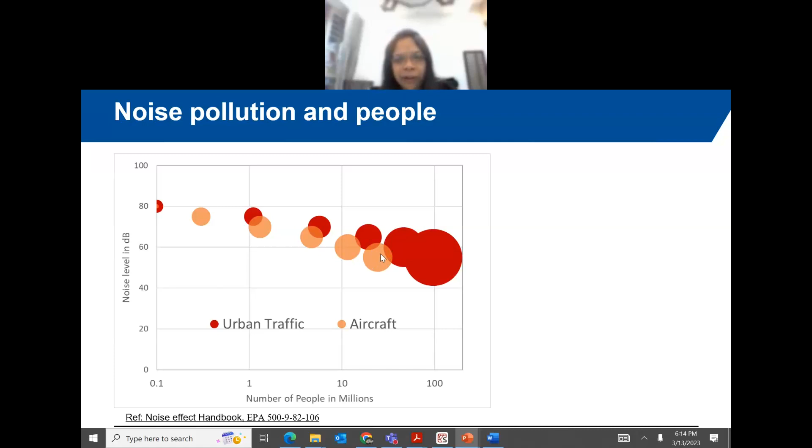The second most common noise source is aircraft noise, and the noise level generated is also significantly high. But if you look at the size of these bubbles, they are smaller. That means the population affected by these noise levels is relatively lower than for urban traffic. The rail noise and industrial noises are also relatively low. So this plot shows that urban traffic is affecting a wide range of people, and that should really be looked into if we want to improve people's lives.

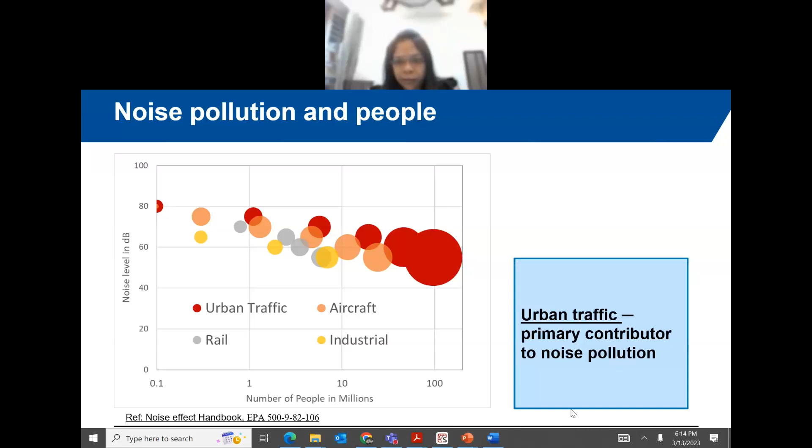When we look at noise pollution and how it spreads throughout the environment, noise is nothing but a disturbance that propagates through an elastic medium such as air or water. Usually, noise is nothing but an unpleasant sound. For example, when a vehicle is traveling, it generates noise, and that sound propagates through the air and is received by the receptor or receiver.

When we look at the physics involved, noise is nothing but a pressure wave, where the density of the medium changes. In terms of physical properties, noise and sound share similar ones. The amplitude of the pressure is the variation of the pressure over the hearing threshold. Our hearing threshold is 2e-5 Pascal.

The frequency is when we fix one particular position and count the number of waves passing through in 1 second; that we call frequency. The distance between two peaks or two troughs we call the wavelength. These are the basic sound or noise properties we can refer to, and they are very important as we go forward in this presentation.

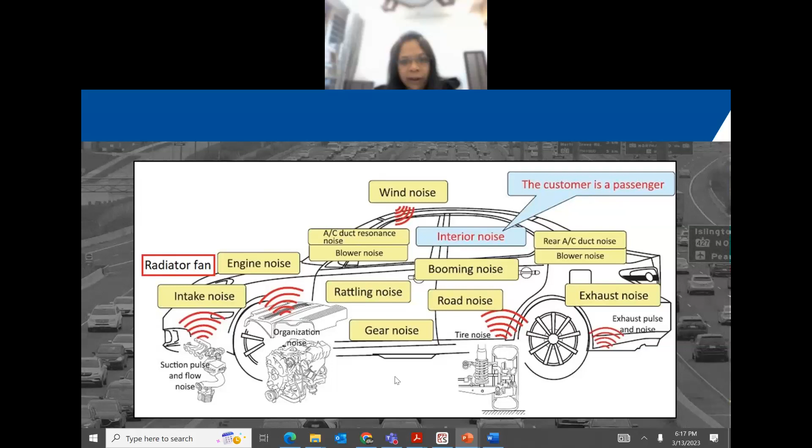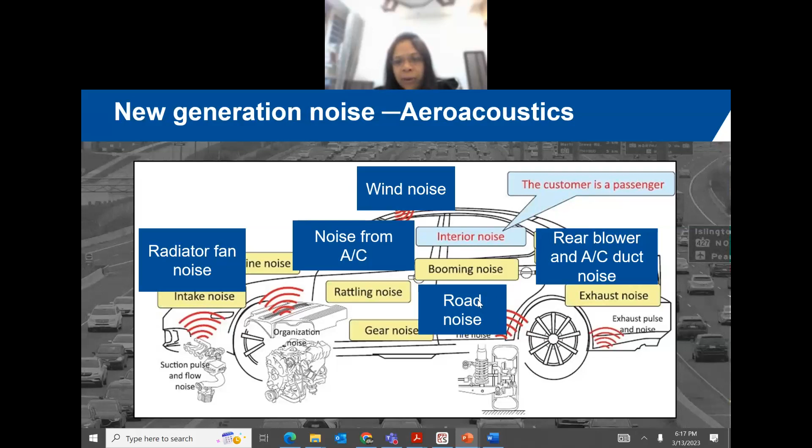But with electric vehicle development, the engine is gone and those conventional noise sources have been removed. So all those previously masked noise sources have popped up. Now we see that radiator fan noise, AC noise, wind noise, road noise, and the rear AC or blower noise are becoming dominant noise sources in electric vehicles. Road noise is not completely an aeroacoustic problem, but it is partially an aeroacoustic problem.

Apart from that, a new challenge is coming up: fast charging stations. Now the requirement is that we want our car to be charged very quickly, and that demands a very high fan RPM, because the heat produced by the batteries needs to be cooled down quickly. The high fan RPM produces a lot of noise, and that is one of the upcoming noise sources, or it has already entered the market and people's lives.

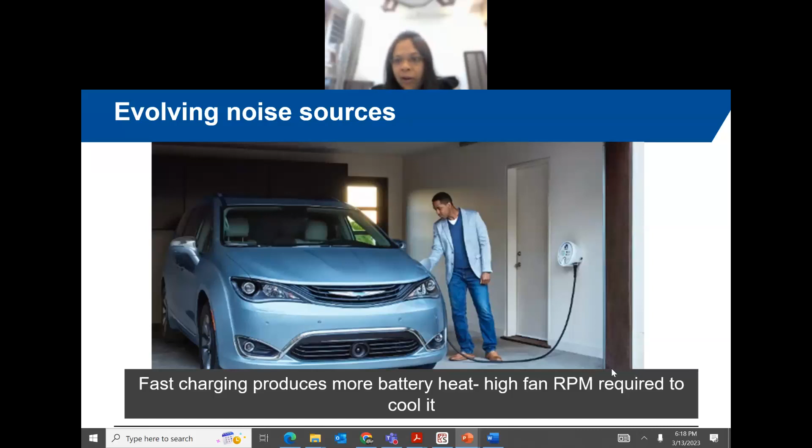Still, noise is a concern because, according to the British Medical Bulletin, noise causes permanent hearing loss, distress, hypertension, and cardiac diseases. Apart from these health problems, it is very important right now for an OEM to achieve noise comfort, because all other comfort has been addressed and customers are asking more about noise comfort inside and outside the car. So that's why it is more important for any OEM to develop such solutions.

Secondly, before launching the vehicle, the OEM has to qualify the pass-by noise certification. So now the engine and exhaust noise are gone. So all the other noise, like radiator fan noise, or other noises that are bothering the customer need to be reduced, and the pass-by noises like radiator fan noise need to be reduced to qualify the EPA certification.

And thirdly, now the competition is very big, and only with the leading technology can an OEM beat this competition. So therefore, noise is a big concern, and it's now a more asked-for customer feature for any vehicle.

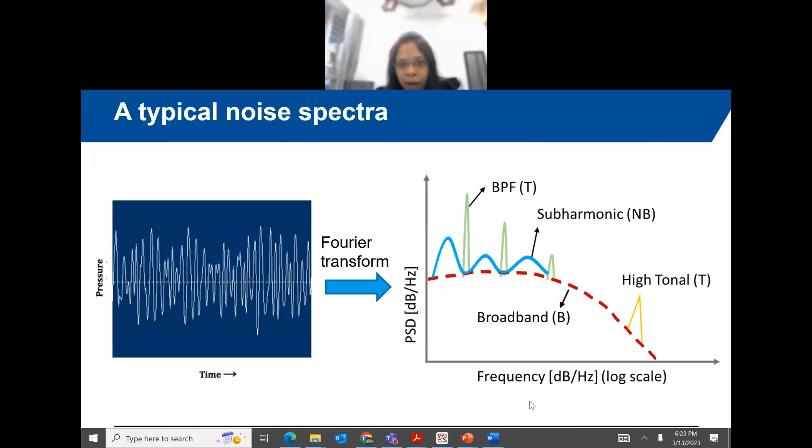So when we look at the different noise sources, we can categorize them in different forms based on the way they propagate. A monopole is nothing but a single noise source, and its wavefronts are traveling in all directions. And if we take the amplitude at any one wavefront, the amplitude does not vary. It will remain constant along any wavefront. This is a typical example of volume fluctuations; a real life example is loudspeaker noise. And if we plot its directivity in all 360 degrees, we will hear a single amplitude.

Secondly, the dipole source. A dipole source is nothing but two monopole sources placed at a position, but they are out of phase. So if this is in a positive phase, the other one is in a negative phase, and vice versa. And these dipole sources basically propagate parallel to their fluctuation, and we see that noise cancellation will happen in the normal direction of their fluctuation.

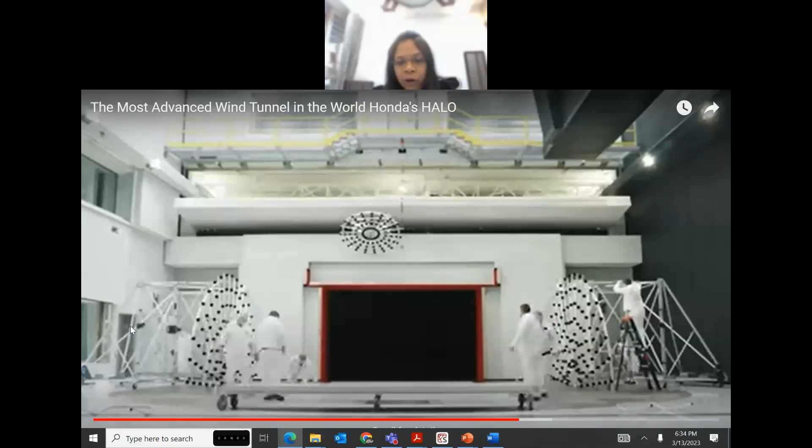And we talked about earlier, this would be really good for accessories, roof racks or spoilers or anything where all of a sudden there's a sound and they don't know where the sound came from. That's correct. The whole point of these arrays is to quickly give the engineer all the tools he needs to identify where the noise is coming from and how severe it is.

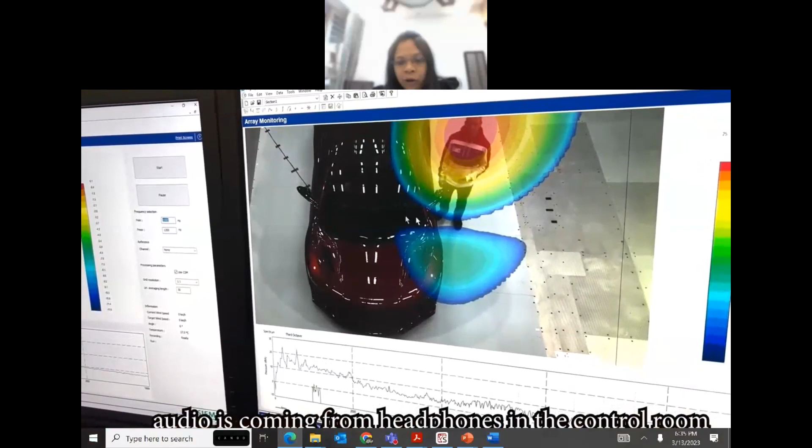When it comes to acoustic wind tunnel, there's a camera that I'm speaking into now, and all those microphones around me, and I want to see what it looks like in the control center when I'm speaking. So I'm at a normal voice now. I'm going to raise my voice to a much louder voice to see what it looks like in the control room, and the colors should be changing in my voice right now.

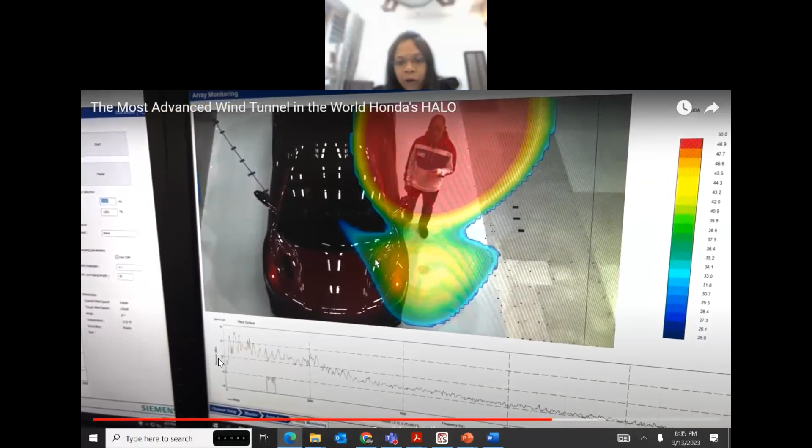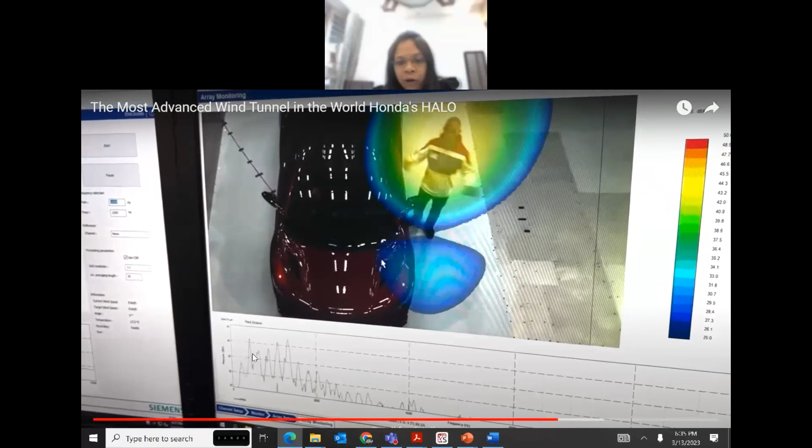And as I bring my voice down, I'm going to bring my voice down to a quiet whisper and see if I can get my voice to still be heard and to see how blue it is. So that should be a test from very, very quiet to a little bit louder to a little bit louder to a little bit louder to loud. How cool is that?

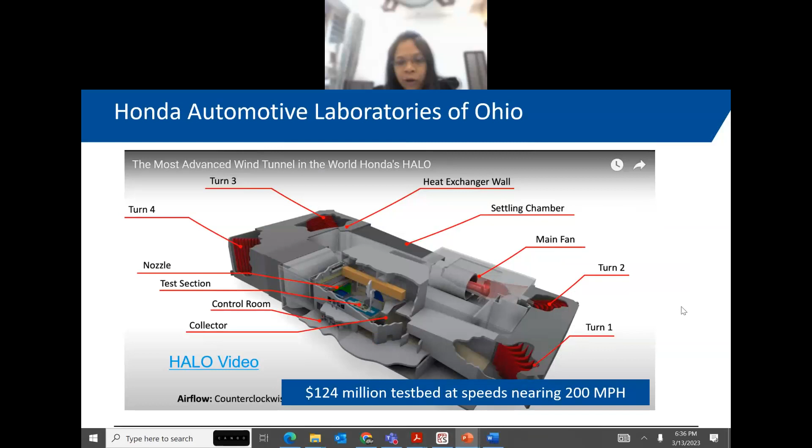So yeah, that is called the acoustic camera technique, where it identifies from which direction the sound is coming, and it helps to localize the noise sources. So before that, we can look at just a small bit of physics about how a microphone records the sound, and then we can go about other noise source identification techniques.

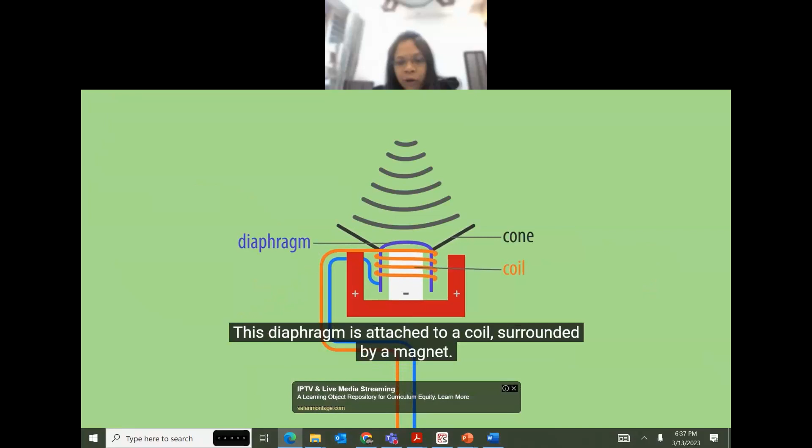How do microphones work? Though they have their differences and different uses, they are all transducers, converting sound waves to an electrical signal. The dynamic microphone is the most commonly used. These work using electromagnetic induction. Sound waves hit a thin diaphragm, which causes it to move. This diaphragm is attached to a coil surrounded by a magnet. This magnet creates a magnetic field around the coil.

The sound waves hitting the diaphragm are moving the coil, and the coil's movement past the magnet creates an electrical current. This electrical current is your sound signal. Loudspeakers work in reverse. Here, the incoming sound signal moves the coil, which in turn moves the diaphragm, creating sound waves.

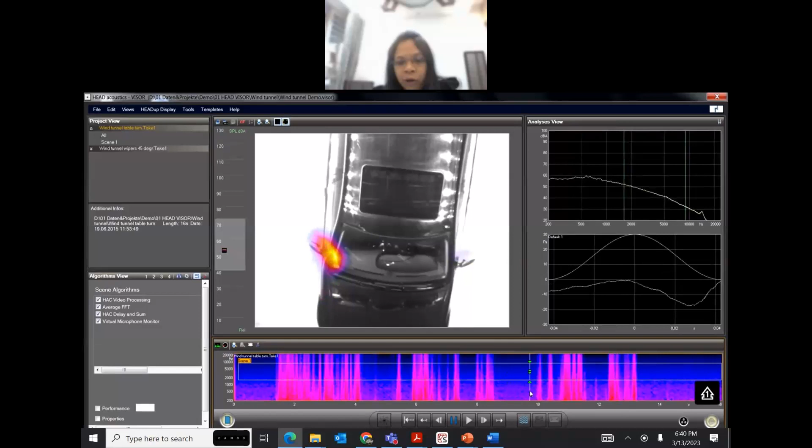Let's check out a real car measurement. The air arrives from the front. The two side mirrors are the obvious noise sources. But if we yaw the car a little bit to one side, we see an effect on the main radiating areas. The right mirror is less noticeable, while the left mirror area gets an additional noise source from the A-pillar close by. This effect increases the more we yaw this car.

Let's turn in the other direction. Here we have the situation again with the car into the wind at 0 degrees, and the noise is radiated from both mirrors. But when we yaw a little bit further, we see how the wind against the A-pillar becomes the dominant noise source. Let's summarize. Both systems use the same software and therefore

And then we can put some pressure sensors like surface pressure microphones, and then we can try to correlate between the surface pressure microphones and the far field microphones. Then there is another method to identify from which direction the noise is coming. So we can have near field microphones as well as far field microphones, and that will help us in noise source identification. So these are the methods that are used in any test setup.

So just to give an idea, a one-day testing at a wind tunnel for a full vehicle will cost around $70,000 to $80,000. So one limitation is that it is expensive. The second problem is we can test the noises only once the vehicle is built. And once the vehicle is built, going back and doing any design changes is very difficult. And that's why the simulation plays an important role here.

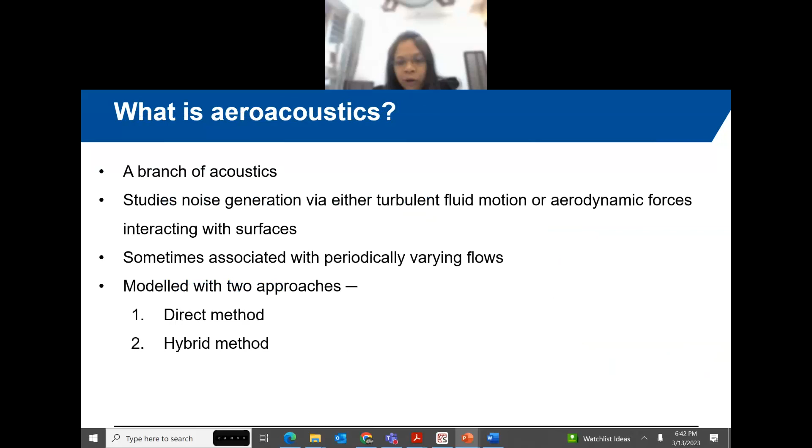And these noises can be modeled either with the direct method or with the hybrid method, and we can look at their pros and cons in the coming slides. So the direct method is where we put all the microphones around the source, and these microphones are included in a computational domain. So the pressure wave or the pressure fluctuation that is traveling from source to the receiver is modeled in this domain.

One of the advantages is that if there are any objects present between the source and receiver, and if they are causing any scattering or reflection effect, that is properly captured in this type of simulation. The noise prediction accuracy is very good. I have done a couple of simulations with direct acoustics, and believe me, the prediction is on top of the test data. So it is a really good, accurate method when it comes to predicting accurate noise levels.

Whereas this method requires large computational time as well as a big computational domain, because we need to include the noise sources and microphone receivers inside the domain, based on the frequency of interest. For example, if you want to capture high frequency noise, then we need to solve this equation at a very low time step, for example, 2e-5 seconds.

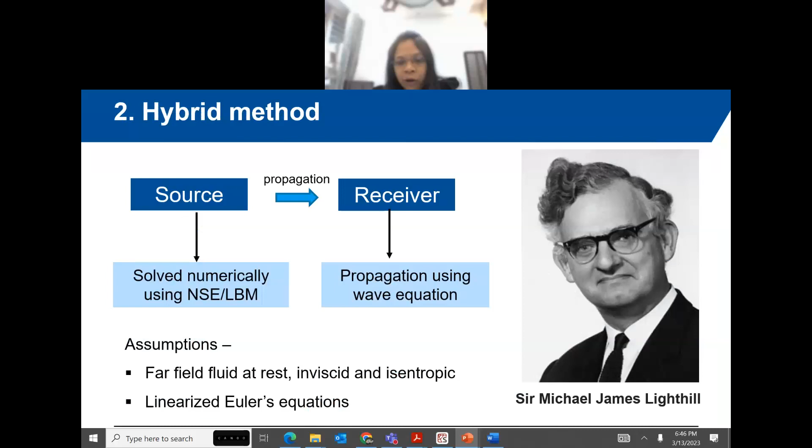Whereas Lighthill analogy tells us that we can model just a domain very close to the jet region, and that will give us the source. So this source is nothing but it's called the Lighthill tensor. And then once we know this source, we can use this wave equation to propagate the sound. So this is the basis of the analogy, and it's a typical example of any non-homogeneous wave equation.

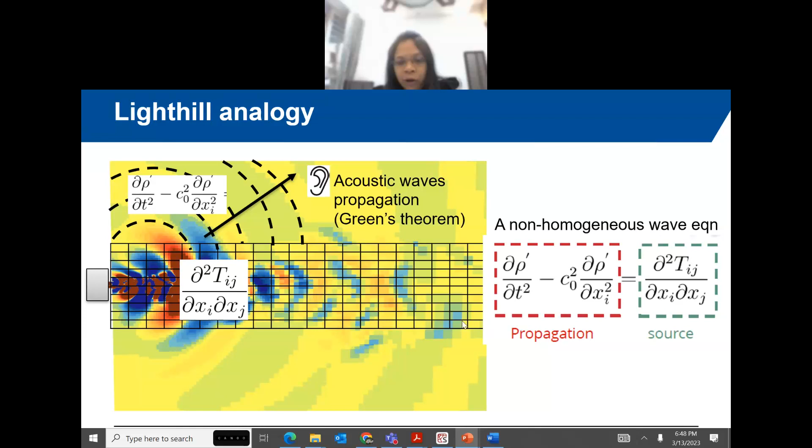So Lighthill analogy was very limited to high Mach numbers, and for only jet flows, where the noise is mainly generated by the turbulence produced by this jet flow. But the engineering problem is not only limited to these jet flows, but there are always some surface interactions, or sometimes the surface is rotating. And that's what Curle has added, extended Lighthill analogy, and he introduced a surface in the flow field.

And now he came up that the noise propagated in the far field is the result of lift fluctuation caused by the incoming flow. So once we know the lift fluctuation, we can propagate it to the far field using the same non-homogeneous wave equation. Secondly, Ffowcs Williams-Hawkings analogy identified that there is a need of including the rotation to these surfaces. Therefore, they modified the equation so that we can account for the rotating machineries as well.

So now we understood the direct method and the analogies that have been used, and the analogies adapted for the surface and the moving surfaces. So there are other methods also present, which are called hybrid methods. In hybrid methods, one of the methods is LEE. It is short for linearized Euler equation.

It's the same phenomenon: instead of modeling the whole computational domain, we can model just the domain very close to the source. The only difference is the way we propagate the noise is different than the analogy. The analogy is the analytical solution of the non-homogeneous wave equation, whereas here we are using the linearized Euler equation. We are solving the wave propagation on an inviscid domain, and this makes the computation relatively cheaper compared to the direct method, whereas it has a disadvantage that it needs a very small mesh when it comes to high frequency noise recording.

Then next is the control surface method or Kirchhoff method. In the Kirchhoff method, the pressure fluctuations are measured on the control surfaces, and then these pressure fluctuations are solved numerically, so that we can identify the noise levels at the receiver location. This method is suitable for a fixed medium where the medium of propagation is not moving. But there is a solution given by Goldstein et al., where they provide the solution for the moving medium also.

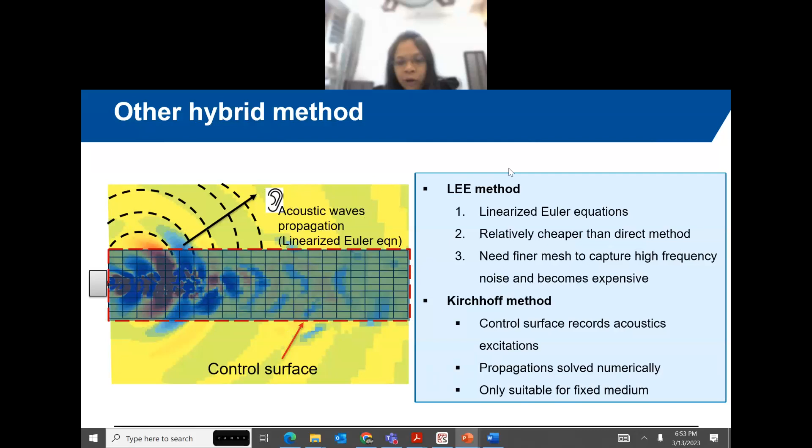So we understood how we can propagate the source, but now we can look at how we can model the source. To model the source, there are multiple methods present. If you want really accurate calculations of the flow field, we can always go for direct numerical simulation, where we solve the 3D unsteady compressible Navier-Stokes equations. But it requires a very large domain, and huge computational cost is involved. Even with cloud computing advantages, we still cannot use direct numerical simulation for any industrial problem. It is still limited to academic research problems.

Another alternative is large eddy simulation. Second is detached eddy simulation. Third is scale adaptive simulation. And then there are turbulence models, such as one equation and two equation models. We will see these briefly in coming slides, but make sure that you go through the continuity and momentum equations. Continuity is change of mass in time and space, and momentum is movement of the mass in the domain and variation of the mass with respect to time, equated to the pressure variation, some stress variation, and external forces.

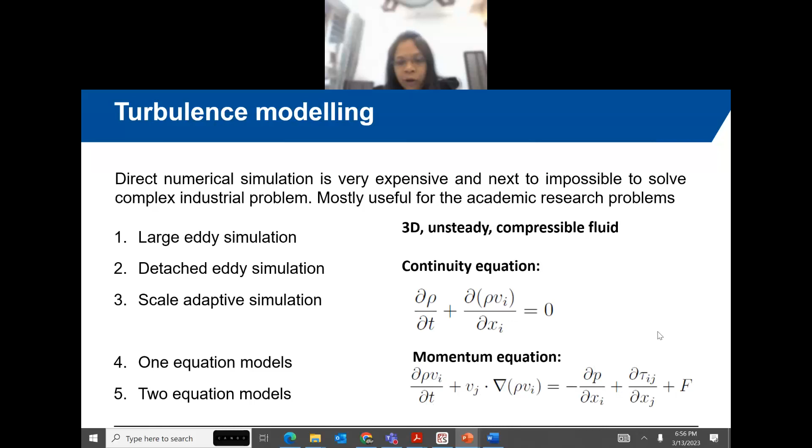In large eddy simulation, we discretize the domain with some given mesh size, and this mesh size identifies which eddy sizes can be solved and which can be modeled. So this mesh acts as a filter, and you can see the averaging here: the flow field variable is decomposed into mean and fluctuating parts. The mean part is solved over a mesh size using this integral equation. This solves the compressible Navier-Stokes equations in transient form over the computational domain. It resolves the eddies based on the mesh size, but eddies smaller than that are modeled with RANS, Reynolds averaged Navier-Stokes equations. The filter size is based on this G filter; the solved flow field is filtered with G in space.

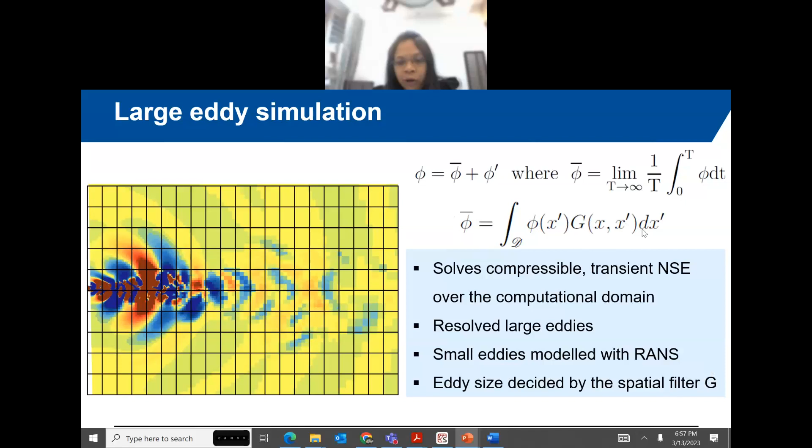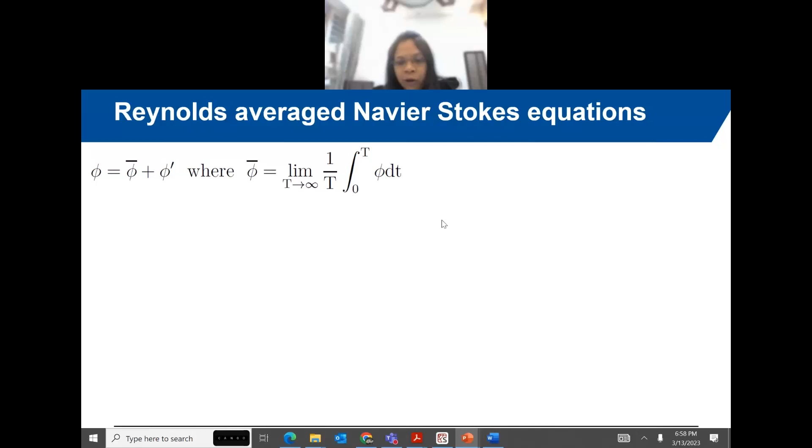So we can have different approaches to model the eddies smaller than the mesh size. And to make the problem easier, Reynolds introduced this averaged equation, known as the Reynolds averaged equation, where he divided the flow field variable into mean and fluctuating quantities and re-derived the Navier-Stokes equations. Once re-derived, they introduced 9 extra terms, and identifying these 9 extra terms was a challenge. Therefore, the Boussinesq assumption is used, where these turbulence stresses are equated to the linear rate of deformation through turbulent viscosity.

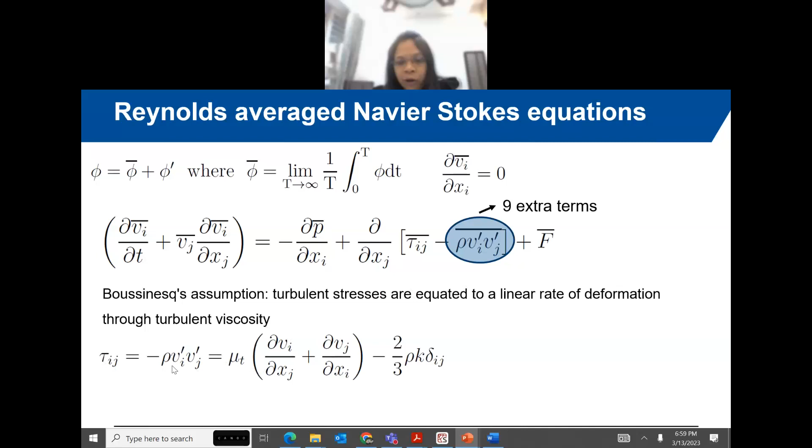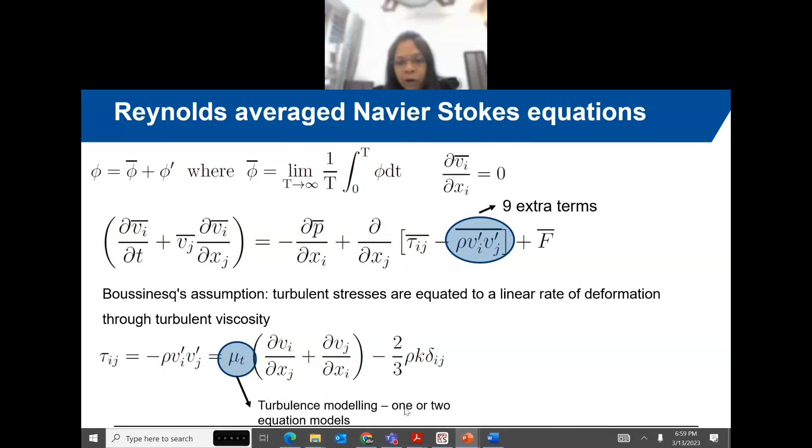If you look at the usual shear stress equation, this is tau ij, and we equate it to viscosity and the change in velocity. So this is what happens: this minus rho vi vj has been modeled with this equation, and this mu t is again the challenging part. The way we solve this mu t is with one or two equations, and we call those turbulence modeling equations.

So these are based on the Navier-Stokes equation that we have discussed so far. There is another method which is known as the lattice-Boltzmann method. It is mainly based on Boltzmann's kinetic theory, and it is based on the mesoscopic approach rather than the macroscopic approach. Navier-Stokes is based on a macroscopic approach, where we divide the flow field domain into small control volumes, whereas in kinetic theory we divide the domain into small particle sizes. And based on that approach, we solve these Boltzmann equations.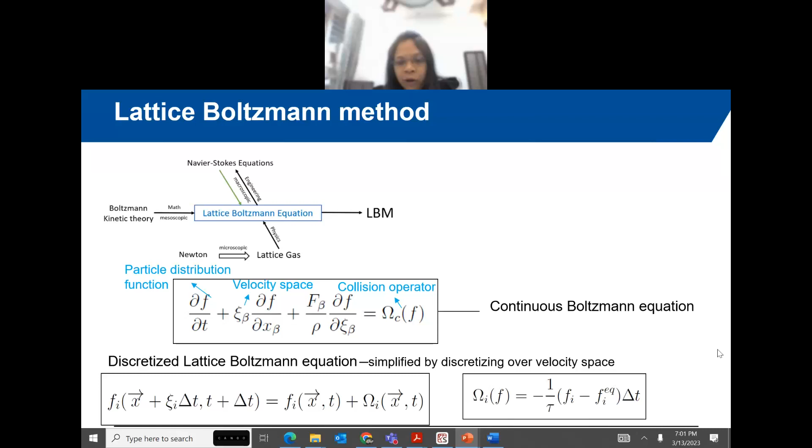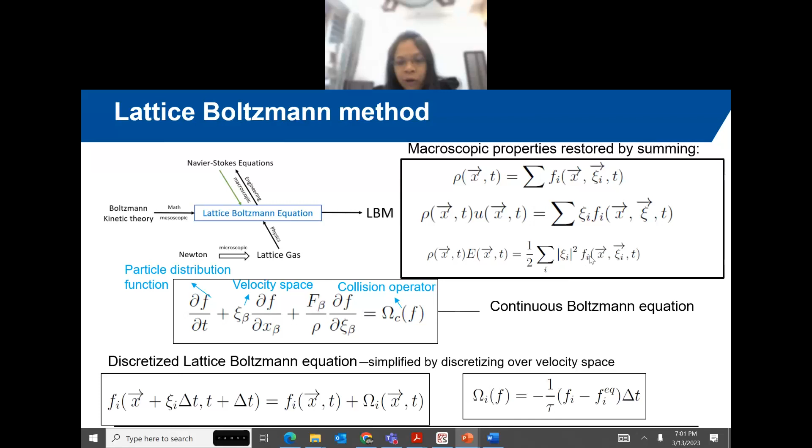And once we know the PDF in the future state, we can identify its macroscopic properties by summing over the PDF to get the density. When we sum the PDF over velocity space, we get the momentum equation. And if we want energy, we can include velocity squared on the PDF, where we get the energy equation.

So there are multiple advantages of the Navier-Stokes equation versus the LBM equation. Navier-Stokes is very popular. It has been adopted by almost all industries. A lot of commercial options are available, for example ANSYS Fluent, Star, and there are multiple other companies using these Navier-Stokes equations. They are based on either a finite element or finite volume approach, but underlying they are solving the Navier-Stokes equation.

They have a dispersive discretization scheme. For example, when the noise is produced at say 40 dB, and when it is propagated to the far field, the simulation may disperse the amplitude as well as the frequency. So they don't have very good low order schemes. If you want to capture the acoustic signature in the far field, we are supposed to use a high order scheme, and that becomes very expensive.

And moreover, to capture any frequency, we need to have, like the example given here, for 2000 hertz, the wavelength is almost 170 mm, and to capture this frequency, we need to have almost 340 grid points in our computational domain to capture the amplitude and the frequency properly.

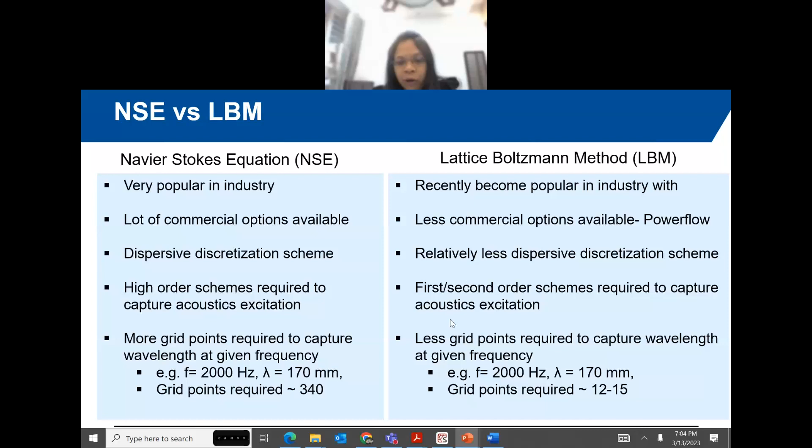Whereas the lattice-Boltzmann method, although it has been known for a long time, has become popular recently with the commercial option available, PowerFLOW, provided by Dassault Systèmes. It has a relatively less dispersive discretization scheme. So instead of going for fourth or fifth order in the Navier-Stokes equation, we can use a first or second order scheme to capture acoustic excitation properly. And again, it is computationally cheaper because for a given 2000 hertz frequency, it will require only 12 to 15 grid points compared to 340 points in the Navier-Stokes equation. So when it comes to noise propagation in the far field, the lattice-Boltzmann method is far more effective than the Navier-Stokes equation.

So this is the background of the acoustics, how we can model the acoustic source, what acoustic sources are present, and how we can record those noises in test, because as CFD engineers we use such high order mathematics, but ultimately we have been asked to correlate the simulation results with real life experiments. Therefore, it is very important for any aeroacoustics engineer to know how the test has been conducted and what potential disturbances can be recorded by those microphones. That knowledge is very important when it comes to the correlation part.

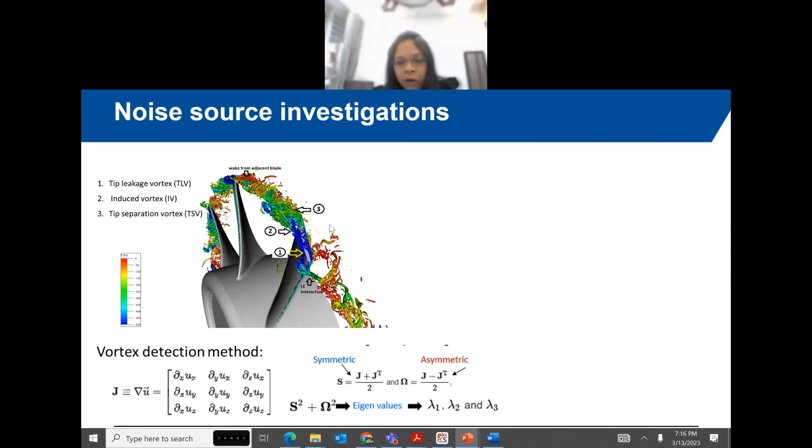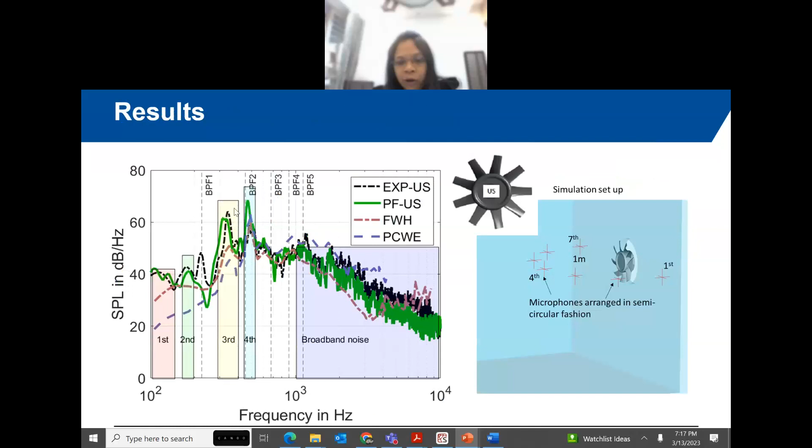And if we look at the spectra over here, we get the higher peak somewhere in this region. So we can correlate that peak with these contour plots, but make sure that this is not directly correlated. This is one of the indications that these surface fluctuations can be responsible for the noise generation.

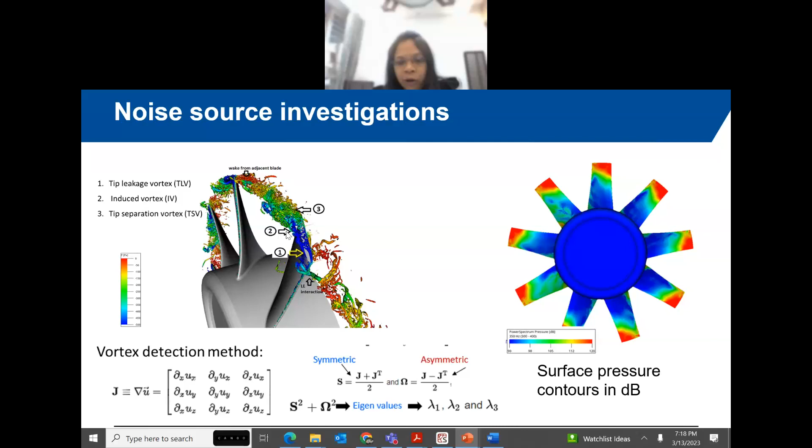Secondly, we can use some analytical method to identify the leading edge noise and trailing edge noise sources. So for example, you have some leading edge interaction with the wake coming from the adjacent blade, and then there are some trailing edge interactions due to the wake formed by this tip vortex. So there are different sources, and you can separate leading edge noise and trailing edge noise with this analytical method.

So Amiet has come up with an analytical method where you can simplify the problem, take the blade and divide it into multiple pieces, and each strip is modeled as a flat plate, and then the excitation is provided in terms of the turbulence parameters, for example, approach velocity excitation, the velocity variation that is causing leading edge noise, and the trailing pressure variation that is causing trailing edge noise.

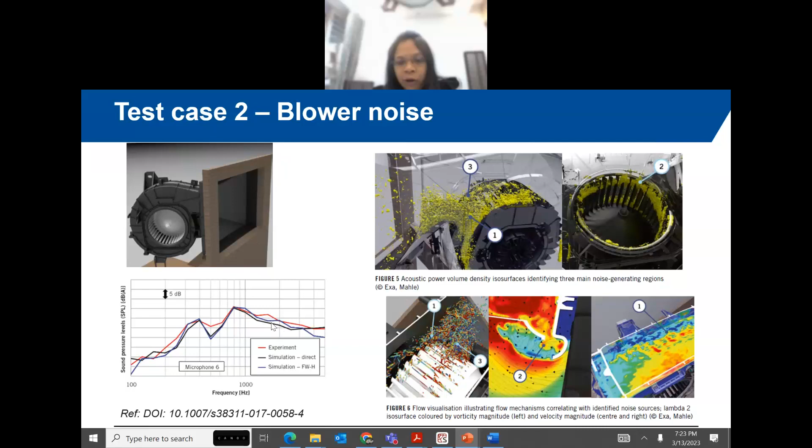Hey, DePauli, I hate to interrupt you, but we got about 10 minutes left. Okay, it's just the last test case, give me 2 minutes and I'll finish that.

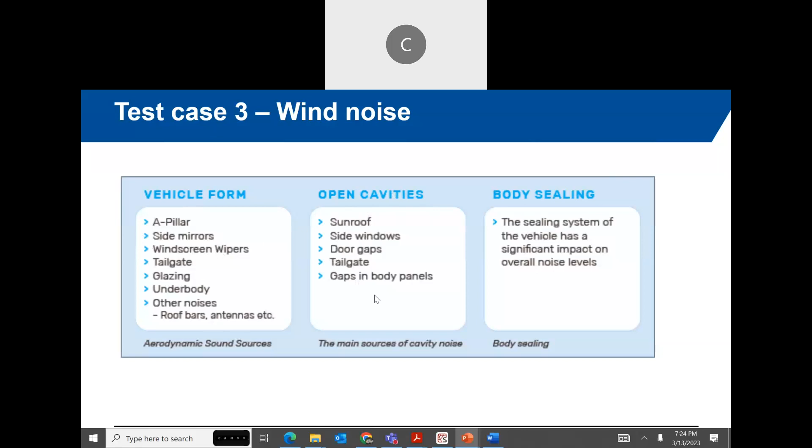Okay, so wind noise is coming from different sources like A-pillar, side mirrors, windshield wipers, tailgate, and other stuff. There are other sources also from open cavities like sunroof, door gaps, and some body sealing issues. So wind noise is again an aeroacoustic problem, but there is more to that. It's a vibroacoustic problem.

So what usually happens is the flow gets separated near the ORVM, and it forms a turbulent wake that interacts with the side window, and that window panel is excited by that turbulent flow, and that excitation excites the internal cavity, and then the noise propagates inside the cabin.

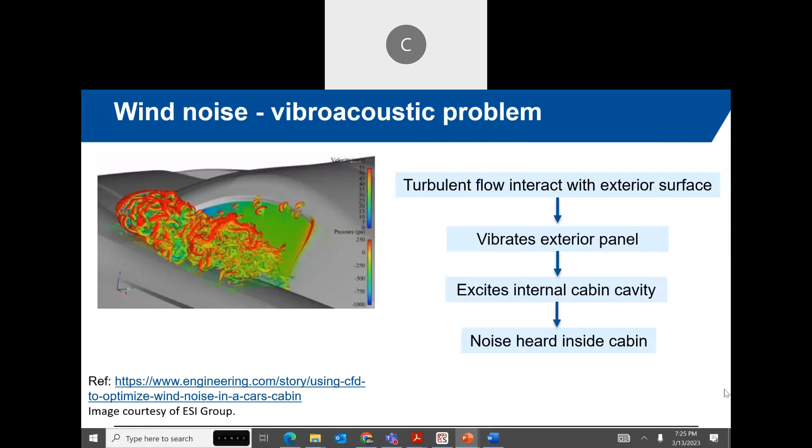So in CFD, we can identify this turbulent flow interaction. We can use some analogies, or the direct method also, to identify noise outside the cabin. But to identify noise inside the cabin, we need to use some structural solver, or we can use some transfer function to propagate that noise inside. So these are multiple applications of aeroacoustic problems.

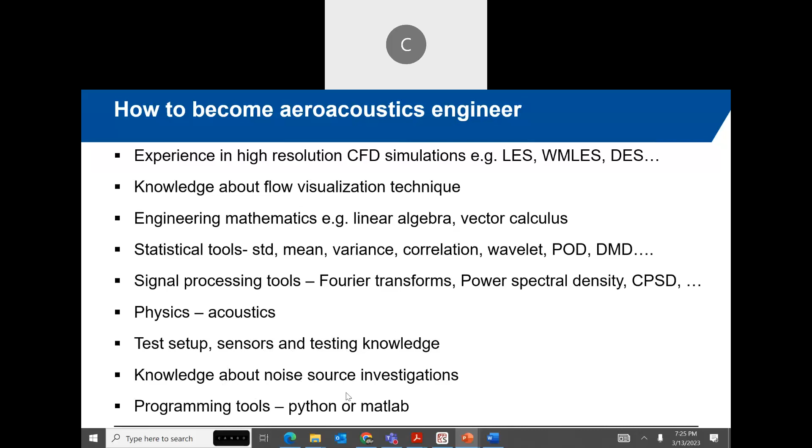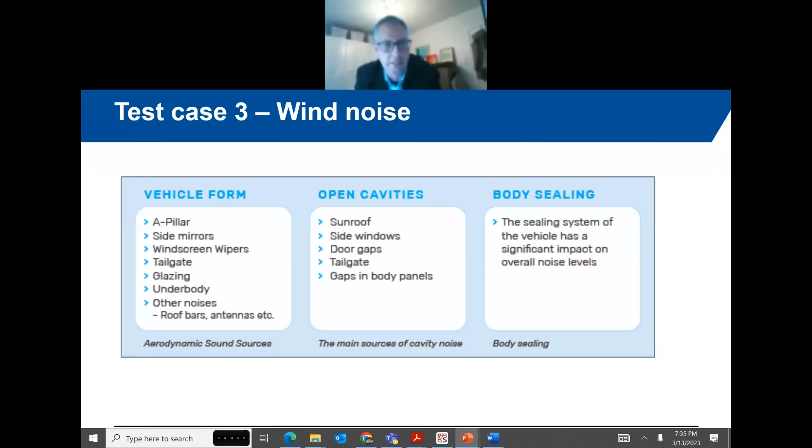I have a question about the importance of verifying their model versus testing. You mentioned the high cost of some of the wind tunnel testing, 70 and $80,000 a day. Are there some problems that are easier to predict than others in terms of modeling? For example, propellers or blades versus the mirror on your car. Are there certain shapes that are easier to model and you get close results with testing than others? Are there some cases where you just have to test?

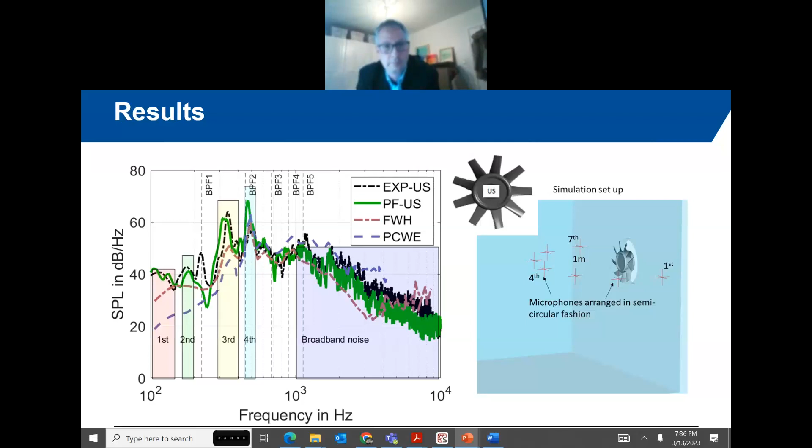Yeah, for example, you can predict the noise with this method very well. The only problem is the identification of the noises and modification of that design. So when it comes to this mirror noise, I was able to predict the noise for this mirror, and it was direct: I need to reduce these turbulence sources and reduce the noise. Or I can create some gap between the mirror wake and the side panel, so that we can avoid the direct interaction with the wake. Once we avoid that interaction, we can reduce the noise.

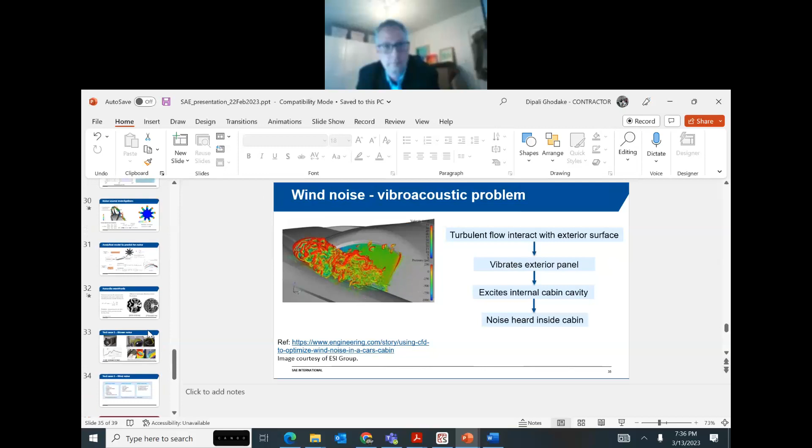But the fan is a very complex system. Although you can predict the noise levels in the far field, identifying what parameters to modify to reduce noise is challenging. So that's why I came for a PhD. I guess my question is, are there cases where you only need to do modeling, or do you always need to do testing to verify the modeling? No, usually the method is you take some simple geometry, do the correlation, and once you have that method established, you can use that method for any design modification. So you don't always have to go for correlation.